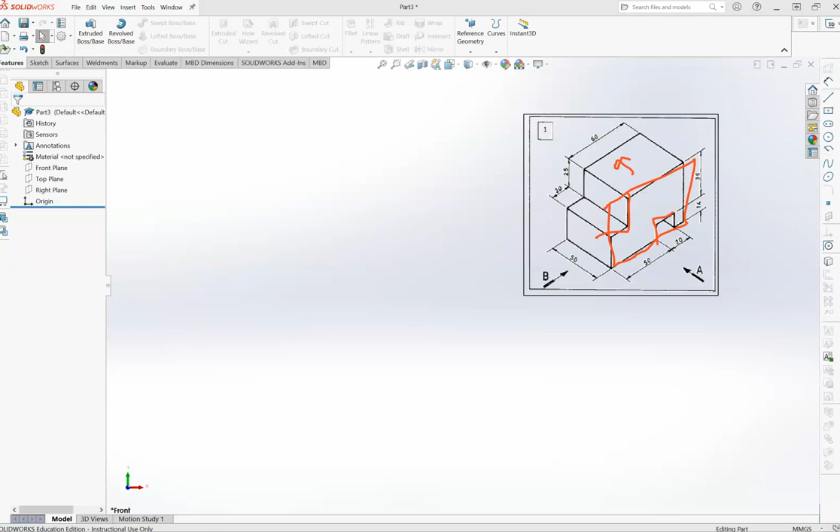There are two approaches to making this shape. One is to draw this basic shape here and extrude in this direction to make the 3D shape. The alternative is to make this whole rectangle like this, extrude in that direction, and then chop out the bits that you don't want. So those are the two approaches I'm going to show today.

Let's start with the front plane, and this is going to be where we draw the funny squarish boot shape and then extrude. So I'm going to go to sketch and choose the line tool. There are a couple of things to understand about the line tool.

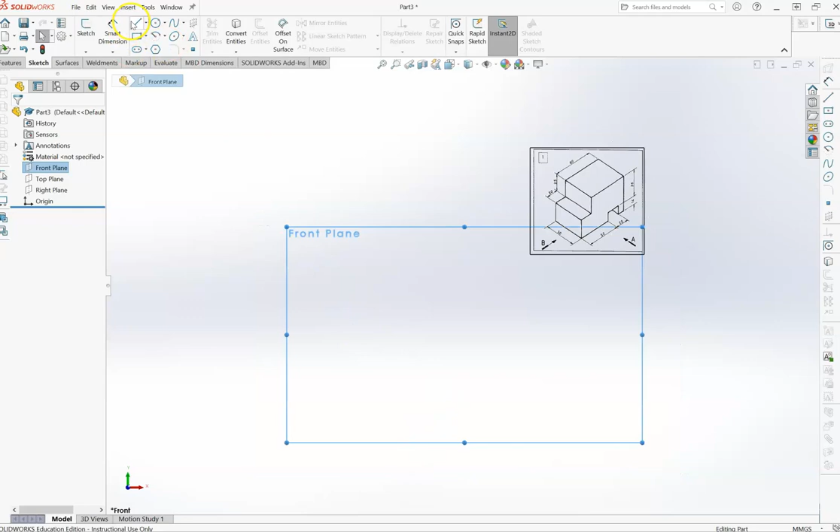One is that you want lots of things to be perpendicular because we're dealing with 90 degrees, so we're going to make sure that things are perpendicular. Using the line tool, I want it to line up approximately with the center of the origin, so I'm going to draw this bit first.

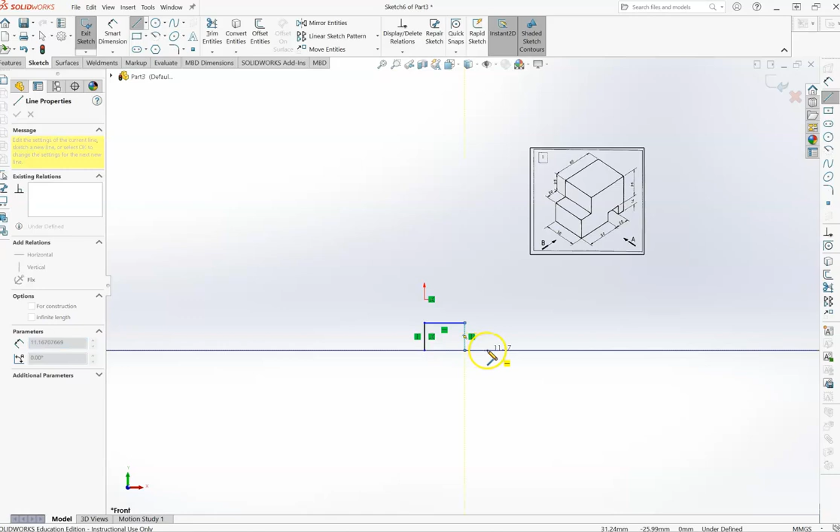From here I'm going to go up. Now it's reading 14 off my diagram, but I don't need to get all the measurements correct because I'm going to do it with Smart Dimension - getting them within the realms of what's actually happening would be good. This is actually 10 mil. We worked that out because the top is 60 plus 20, which is 80 long, and the bottom is 50 plus 20, which is 70 long, and the difference is 10 mil. Then I'm going up 14 and then up 36, which gives me 14 and 36 is 50.

And then along 60, and then down 25, and then along 20, and then down 25 again, and you'll see that dotty line.

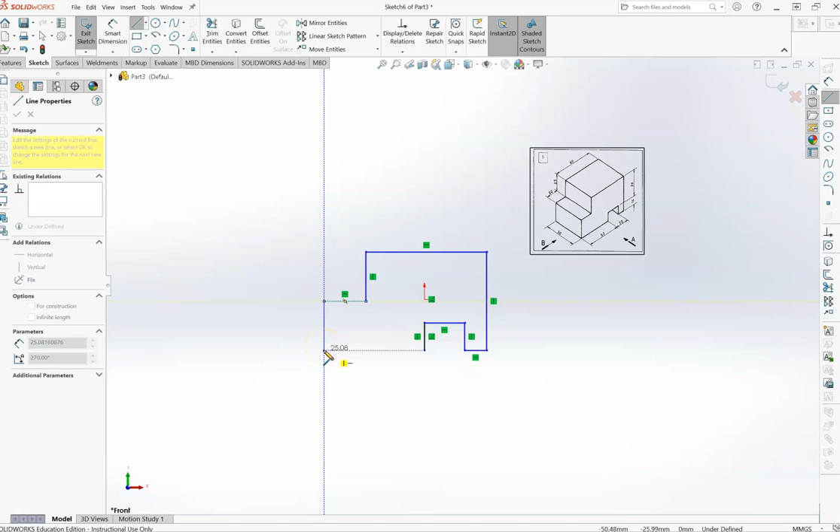The other thing to notice is that I have a yellow highlighted vertical line appearing below my cursor. If I move out of vertical, it goes away, but when I'm in vertical, it gives me that highlighted yellow line, telling me I'm lined up with the horizontal. So I'm going to click there, and then click back to the beginning. This is approximately the shape we want, but not exactly the shape we want.

So we're going to use our Smart Dimension to make it exact. Let's match up the measurements in the diagram. So that's 60. That's 20. This one here is...

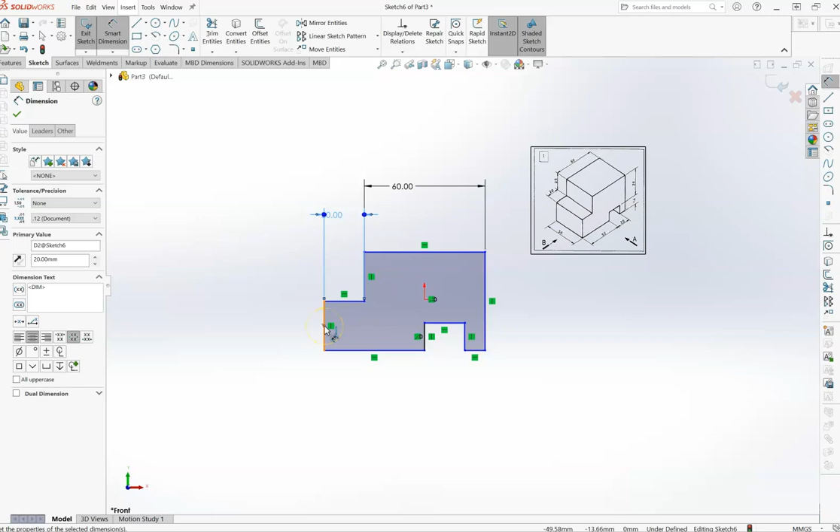Actually not given - we won't put it in because we'll put in the others and it will be calculated. This one here is 50. 36 plus 14 is 50. This one here is 50. This one here is 20.

Now that one is 14. This one here says 14.1. Just going to escape on that for a second.

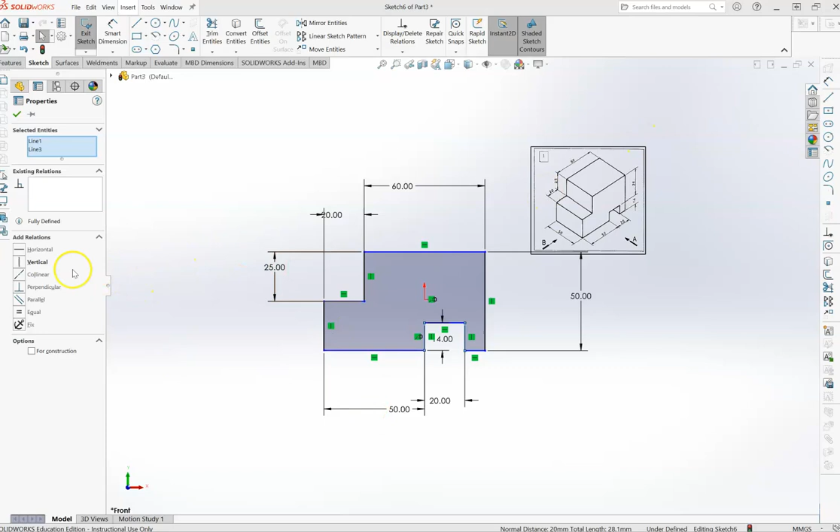What I can do that you might not know from last year is click on that line - don't be in Smart Dimension - click on that line and shift-click on that line, and you'll see that both of those lines appear in the selected entities section here. So what I want to do is make those lines equal. I click the equal thing, and now they are always going to be the same length. So it's now drawn everything back together to make them the same length.

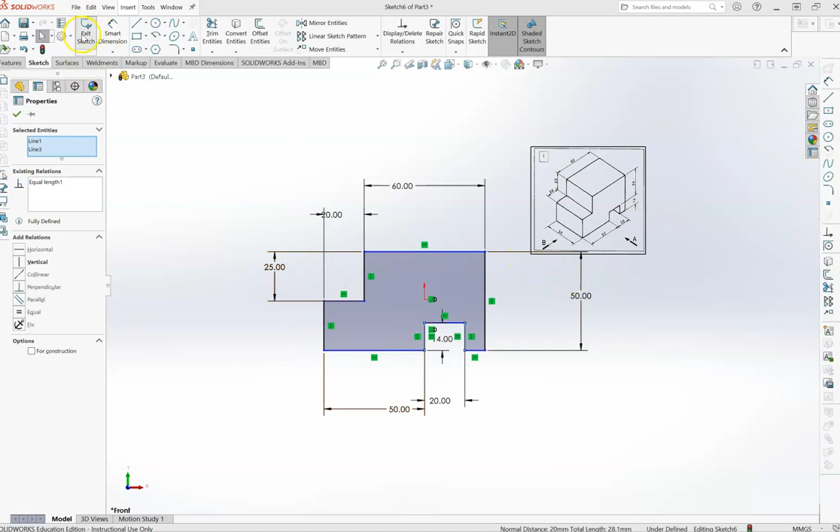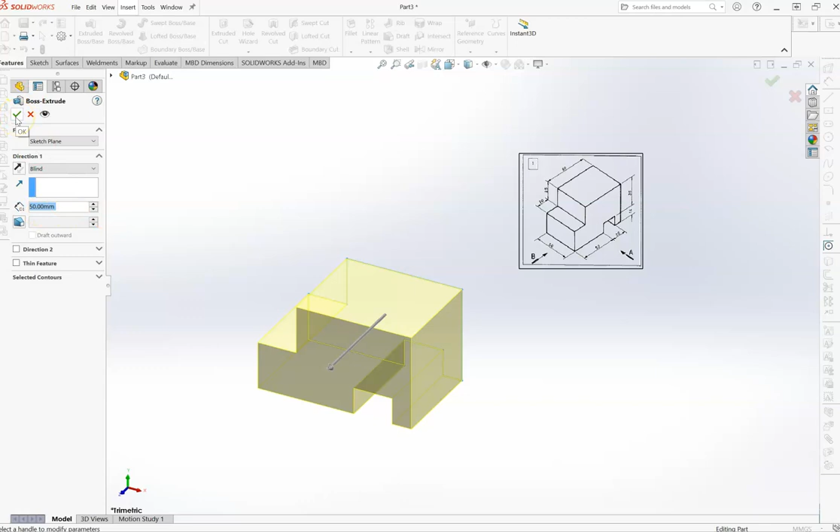Okay, and now I'm satisfied that my shape is the right shape. So I'll exit my sketch, highlight it, and extrude it into the third dimension using Extruded Boss Base, 50 millimeters. Yours might not be 50 millimeters by default, so you can click the arrow keys to get it to 50 or drag it. I would type it, because if you drag it, you can be a little bit off. Then I click tick, and that's the shape we're looking for.

Beautiful. Okay, I'm going to undo all of that and do it an alternative way.

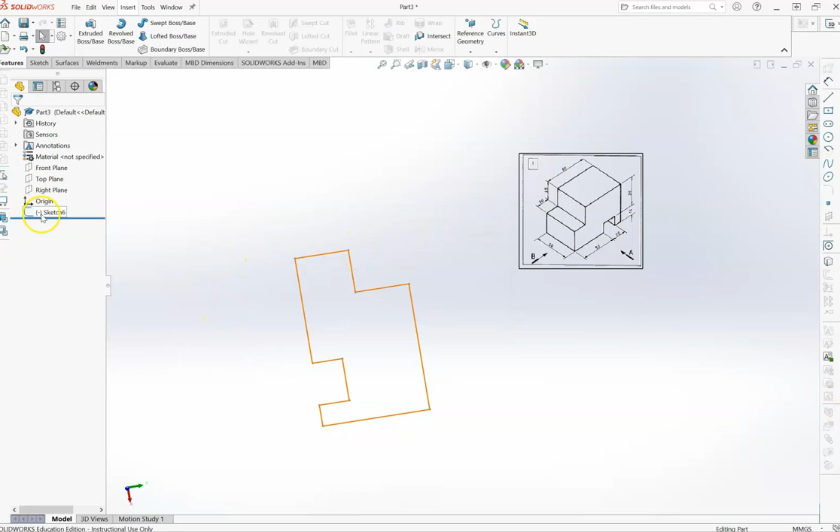So this is what some of the Year 8s found easier to deal with last year, so I'm going to show you that as well.

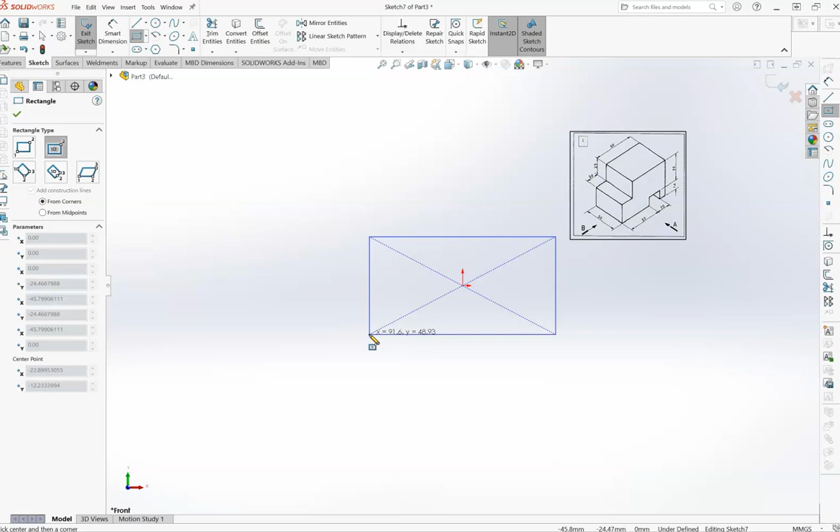So I'm going to draw a rectangle. I need that rectangle to be 80 millimeters by 50 millimeters, but I'm going to Smart Dimension it. So let's go Smart Dimension - we want that to be 50, and we want that to be 80.

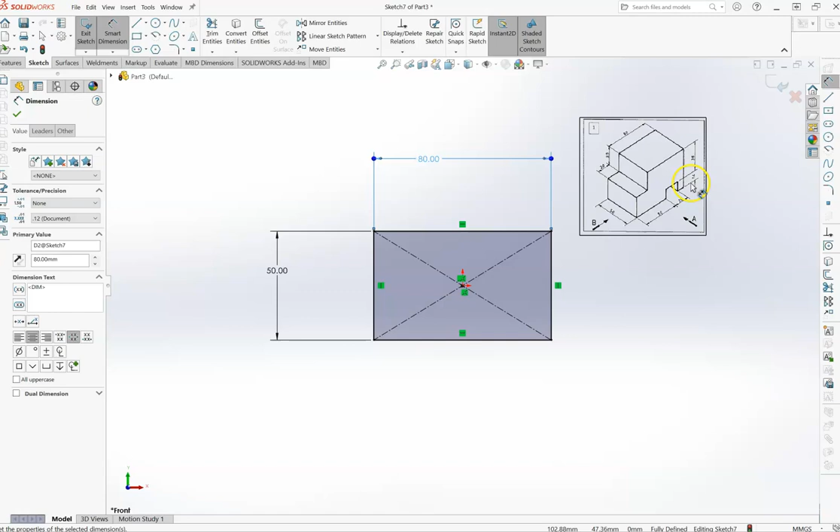Now I could edit this rectangle at this point by removing some of the lines and drawing others in order to get it to look like that side face, but I'm going to show a different way. So exit the sketch and let's extrude that sketch into 3D, 50 mils, and tick. Okay, I now have a rectangular prism that I can cut bits off.

So what I want to do is click on this face - this is the face I want to cut things off. And I want to cut this rectangle here off, and this rectangle here. The second one is a bit harder, so I'm going to do the first one first.

Okay, quite easy, let's go to sketch. Rectangle - we want to draw from this dot here, make sure it lines up, then down, and we can adjust that once we've got it started. So let's do Smart Dimension. According to the diagram, it's 25 millimeters high and 20 millimeters across.

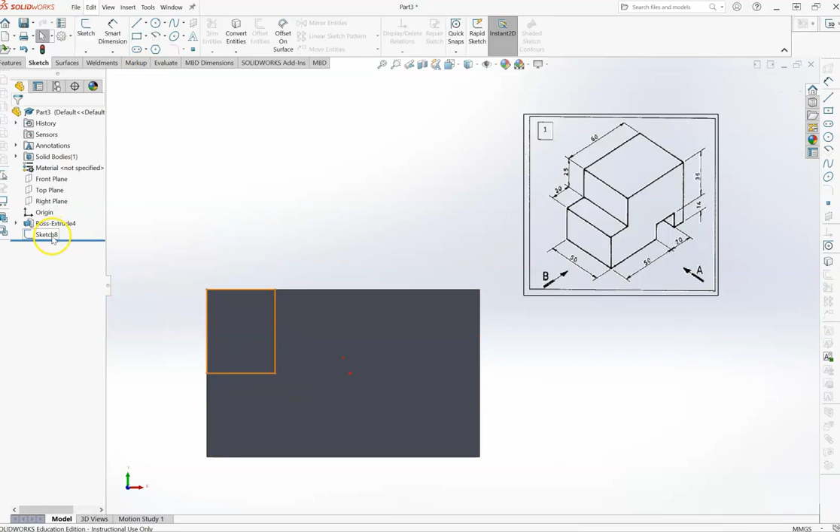Okay, once I have that sketch, I can use it as a cookie cutter and go to Features, Extrude Cut, and it will cut all the way through. Let's double check - 50 millimeters is all the way through. I click tick and I have the first cut done.

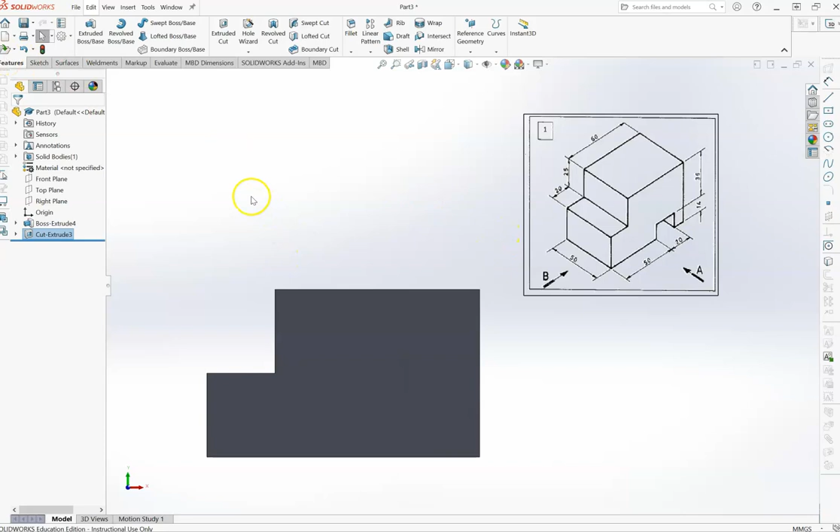And now I want to do one more cut. It's not a difficult thing to cut out, but it is difficult to get the placement right.

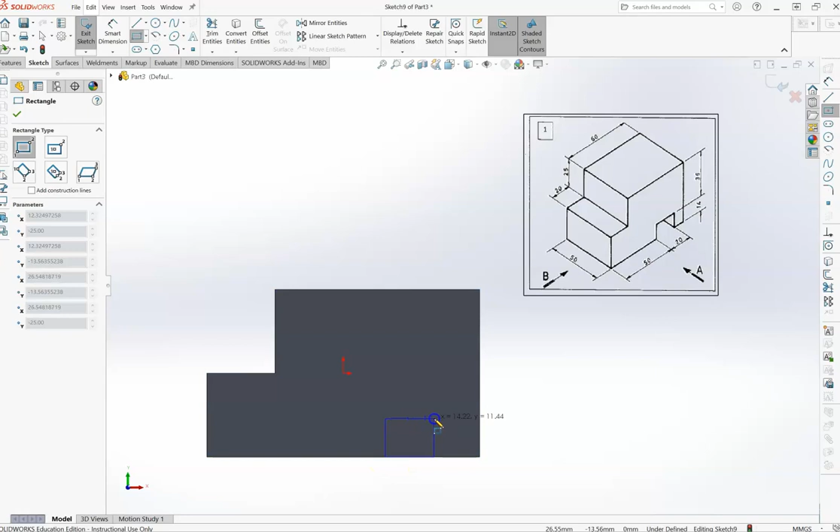Okay, so I want to draw my rectangle from the bottom line to make sure it joins up, and I want it to be 14 by 20. Let's Smart Dimension that to make sure it's actually 14 by 20 - that should be 20, and this here should be 14.

Okay, and now we need that to be 50 millimeters from there to there, and 10 millimeters from there to there. Now we only have to pick one of them. So with Smart Dimension still highlighted, I'm going to hold down my Shift key, click on one line, click on the other line, and draw it down. Make that 50, and it will shift that whole hole to the left so that it's 50 away from that line. I'm going to show that again because it's a bit tricky.

I'm going to click on Smart Dimension, click on this line, hold down the Shift key, click on this second line that I want it to be 50 millimeters away from, and click 50. Magic. Okay, exit sketch, I'm going to chop that all the way through.

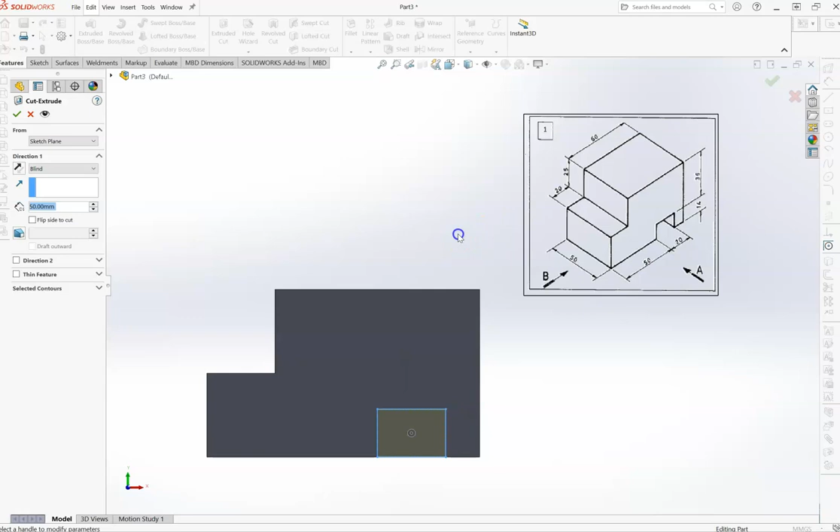So highlight sketch 9, go to Features, Extruded Cut. Now let's double check - 50 millimeters goes all the way through, and click tick. And there is my beautiful 3D model. Okay.